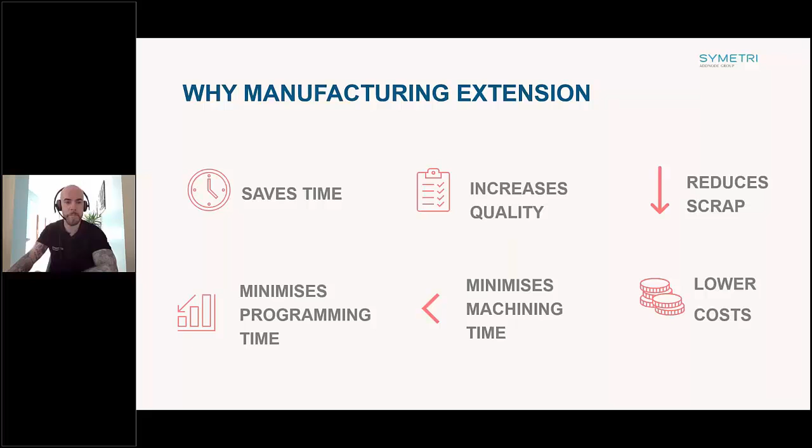So how is the manufacturing extension going to do all of these tasks, or how is it going to help us lower costs and minimize programming and machining times, etc.?

I'm only going to focus on my favorites. Bringing myself back to my machining days, these are the ones I think I'd be using in every single program. On a daily basis, all of these will be used, and they'll definitely decrease your programming time, decrease machining time, increase quality, etc.

I'm only going to skim through my top 5, which are also applicable to 3-axis users. To note, these are very simple to use, not one bit complicated. A lot of people see all these new strategies and think, geez, another area to learn, and get flustered, saying they don't have time. But these are absolutely simple strategies — you can do them in a matter of 5, 6, 7 clicks of the mouse, without putting in a huge amount of information. If you're already a Fusion user, you'll notice how user-friendly the software is, letting you create toolpaths very quickly and easily with the default settings Fusion has built in already.

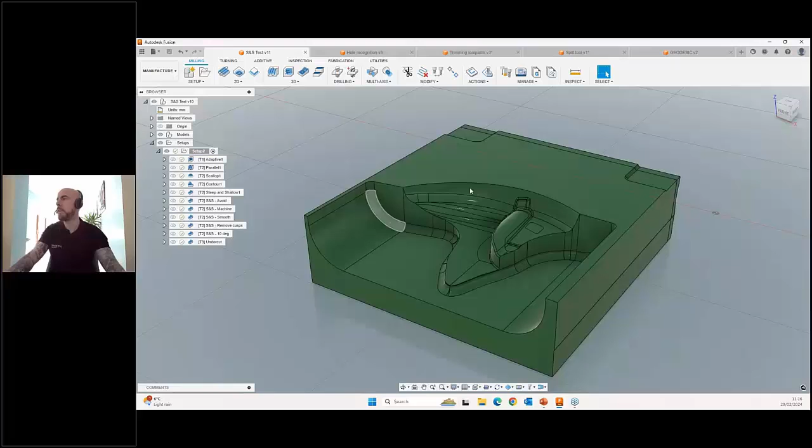So I have this part here on our screen. You can see this part would be fairly complicated to try to machine all of this. We'd have to come in and use multiple different types of strategies. As we can see, we have a huge amount of strategies that come with basic Fusion, so you'd end up spending a lot of time trying to get into all these tiny little areas, getting nice directions, nice flows to work all over.

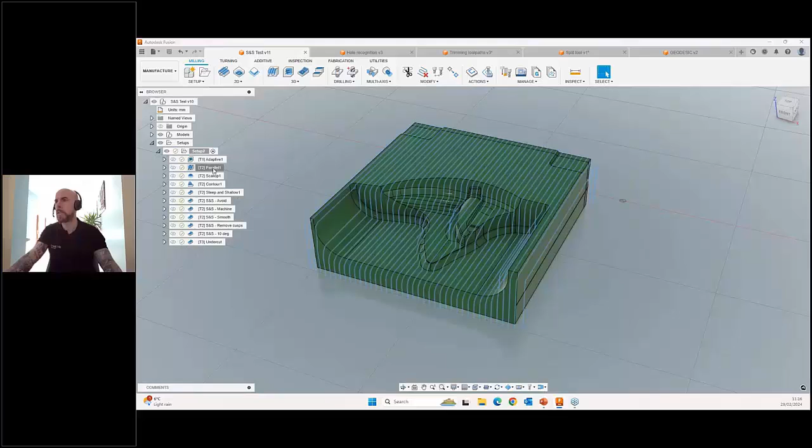One of the basic operations we have with Fusion that you can use without the extension is parallel. You can see parallel does a good job of flying over all of this, but it doesn't do a great job on the steeper areas. It doesn't have any direction either, so you could imagine the finish on this would be fairly crap.

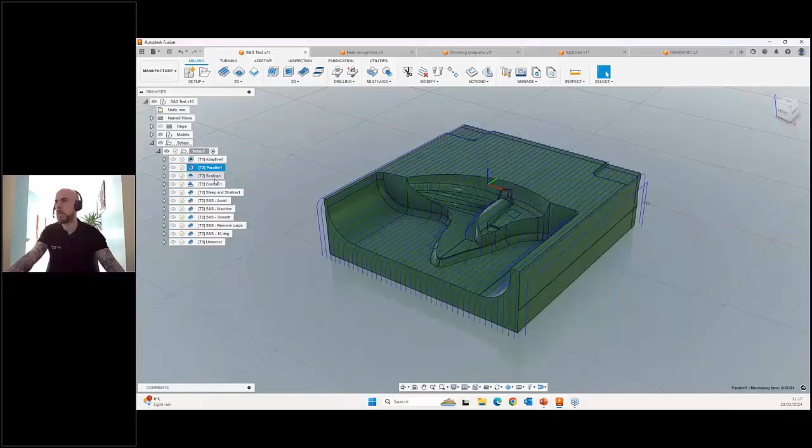We've also got the scallop. Again, scallop does a great job of it - it does a nice job on the steep and the shallow area. But again, you can see the toolpath, it's not going to look pretty when it's finished. It just doesn't go with the flow of the fillets, I suppose.

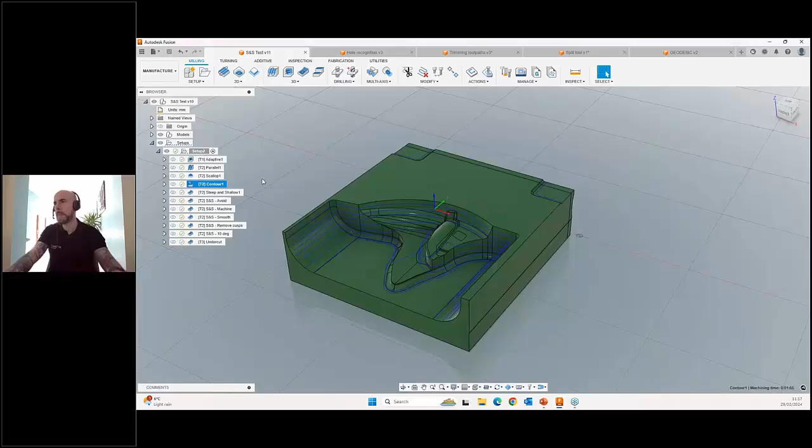And then we have contour. Again, contour does nice - it kind of follows the flow of the fillets, but then it doesn't do a great job anywhere else. So you would end up having to probably have a massive combination of these 3 strategies in order to get in here and do a really neat job of this little pocket area.

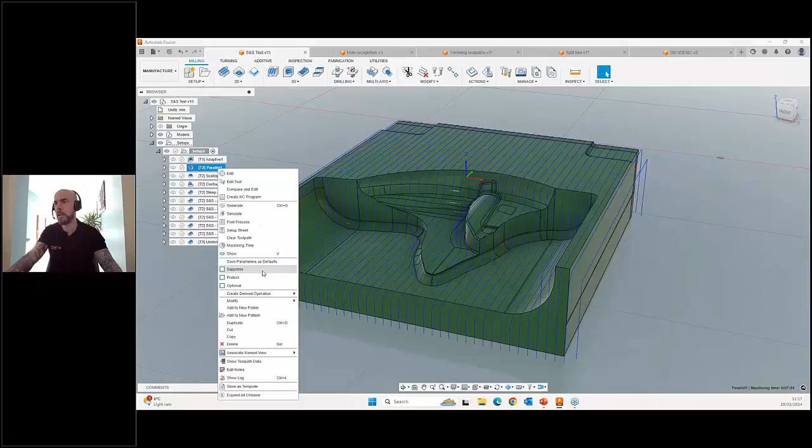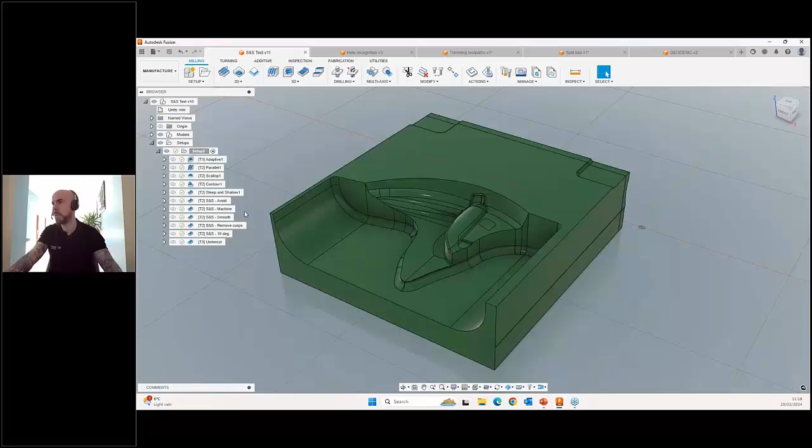While the steep and shallow, it does a really, really good job, and this was just a couple of clicks. I literally selected - I think I did a right click on the parallel and created a derived operation, did a steep and shallow, and all I did is decrease the step over, because I think the step over for all of these was maybe 1 mil or something. So I decreased it to 0.2. It mimicked the parallel and just applied the steep and shallow, but we can see that when the steep and shallow is shown up, it is flowing around with the fillets. It's actually doing a nice job on the flat surface and on the steeper areas as well.

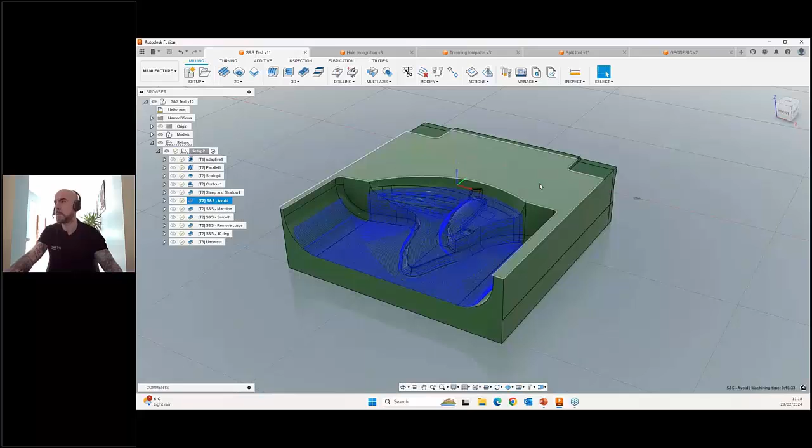Within that strategy as well, we can set it so that we select faces to avoid. We don't want to machine all of this because that would be a waste of time with the ball nose, so we can select what to avoid, or select what to machine. You can see we can just tell it to machine the corners here and the flat surface here, and it is kind of sharp with the corners. We can add smoothing, so you can see the difference between sharp corners and smoothing, and we can remove cusps as well - you can do all of this within the steep and shallow.

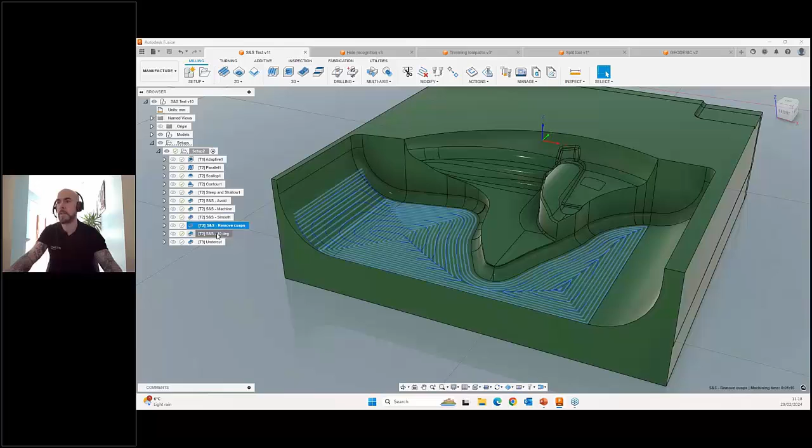So, as I said a while ago, if I go in and edit one of these, we can see the manipulation we can mess around with inside here, where we can tell it what slope from which areas we want to have a scallop and which we want to be parallel, etc. There's a huge amount of manipulation inside this strategy to be able to do this.

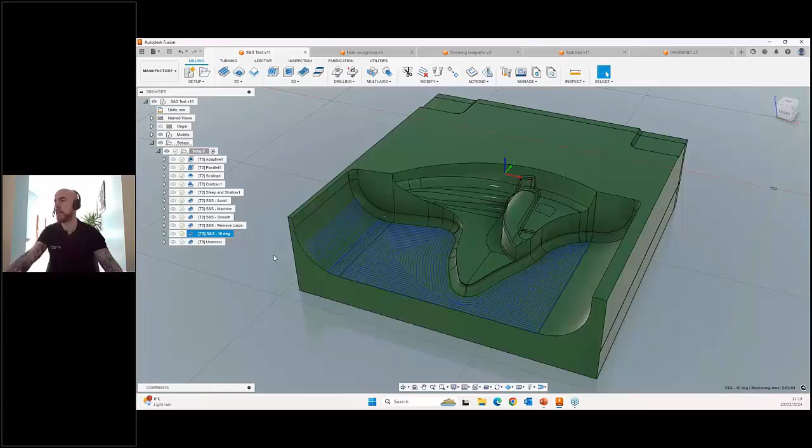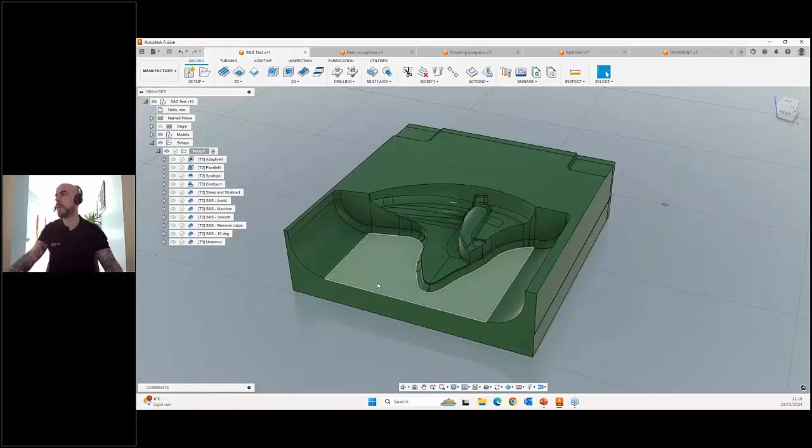But the main point I want to point out is you're cutting down your time basically in 3, probably way more than 3 actually, because the amount of time you'd spend tweaking these 3 strategies to do this, you'd probably save an hour or an hour and a half, if not 2 hours, because it would be very difficult to get in there and machine all of that.

It also allows us the ability to do undercuts. So you can see there's an undercut here. Again, if you have a 3-axis machine and you don't want to be spinning your part up for another operation, we can do the undercut here.

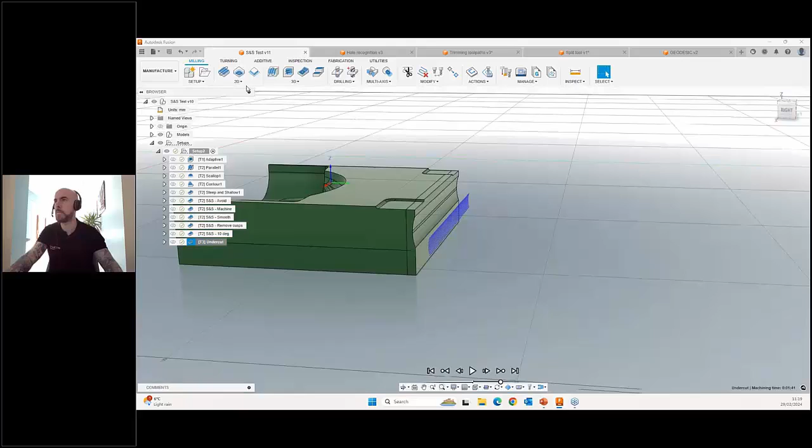So if I just run the simulation, I think I'm using a lollipop tool. You can run that undercut. So that is the undercut.

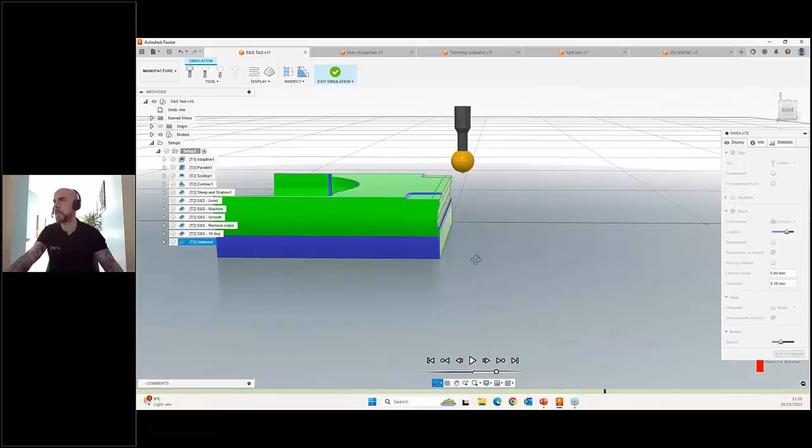So I like to just do little simulations from time to time. It's a bit dodgy when I'm doing it live because it can end up lagging a bit. So if you see it lagging, it's because I'm running this live. But yeah, I like to do the simulations, and I know my manager loves when I do a simulation also.

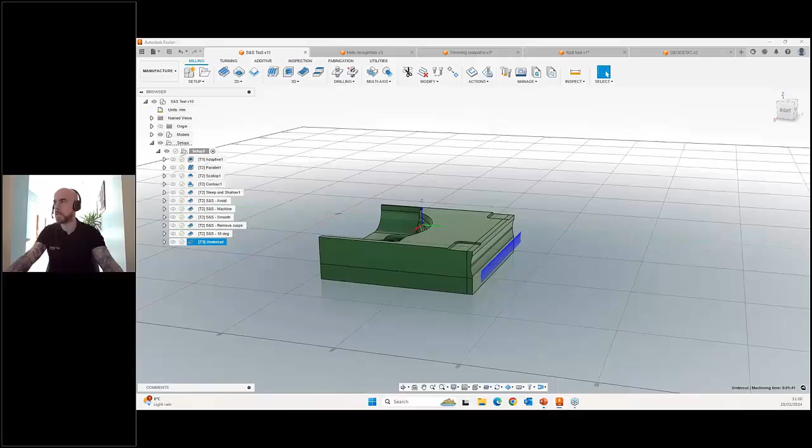So that's a little bit about the steep and shallow. I'm just going to jump back to my PowerPoint. So that's steep and shallow. Again, yeah, it's massive - that one strategy alone is worth getting the extension for.

And I've had customers who have said that also, that one strategy has been a huge time saver for them.

So the next one, the hole recognition, automates the process to create hole machining operations. The model is analyzed for cylinders, and those cylinders are assigned to an action. You can override the selection for different types of actions. The actions will be a combination of spot drilling, counterboring, boring, tapping, or reaming.

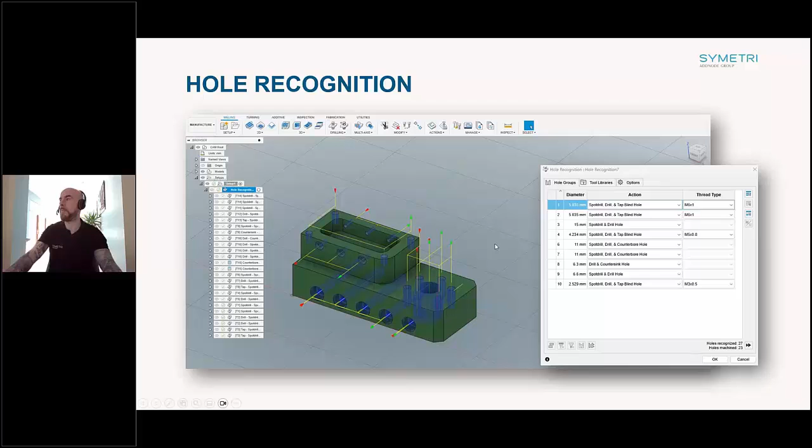So if we just get a little bit of a better look at this, you can see here that by me just selecting the hole recognition, I get this menu appear. And you can see straight away that it pulls out all of this. This is what I was saying a while ago - even if you just wanted to look at a part, you can actually see what type of holes are on this. So you can see it has all of these.

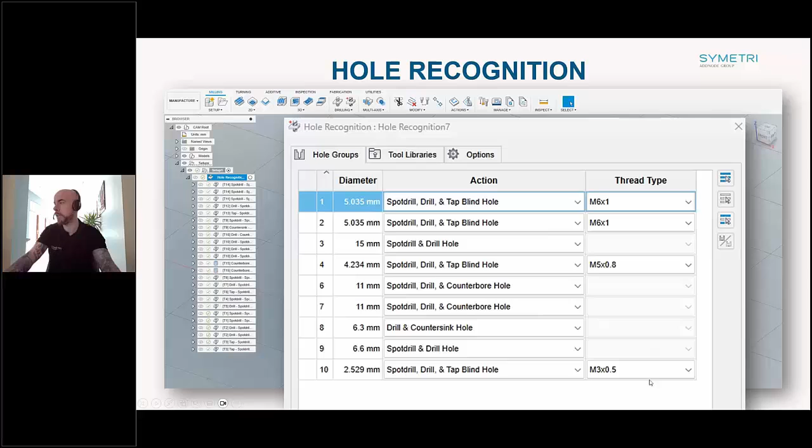Tooling already. So if I just hit OK on that, we'd end up producing all of this. And again, what's that, like 10 seconds work, as opposed to if I was to write all of these without the extension one by one - a couple of hours again, you'd be messing around here trying to do all of this.

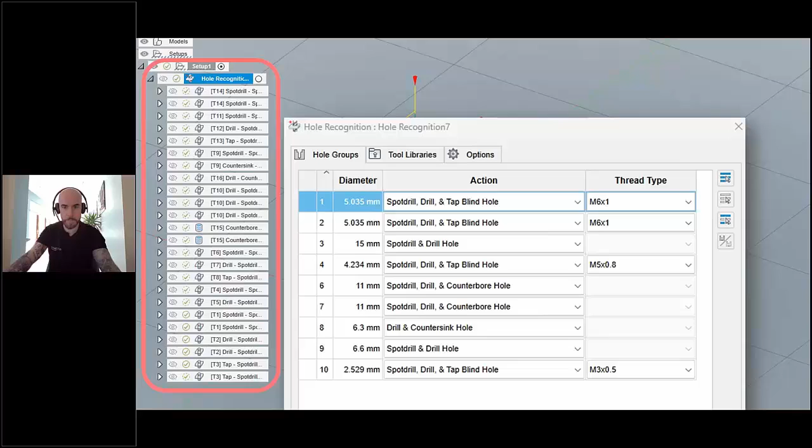What I'm going to do, because it's nice to just - again, some people don't believe me when I say this - so we have a part here, which is the one I had in the PowerPoint. Again, we're running this live. This isn't a video written, so I may make a mistake or I may lag.

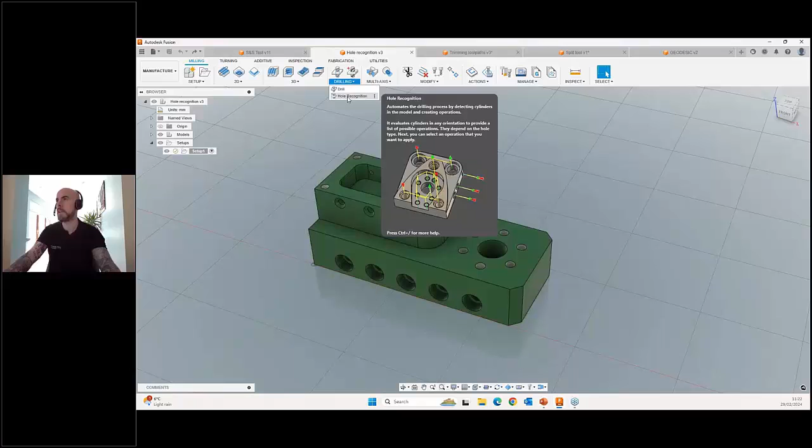So we have a setup done here already. I'm just going to click on the hole recognition. My dialog box appears. You can see it's telling me which holes are which.

And if I want it, I can go into my options and select multi-axis machining, and I go back, and now it's even giving me all the other ones. And if I just press OK, there we are - everything is done.

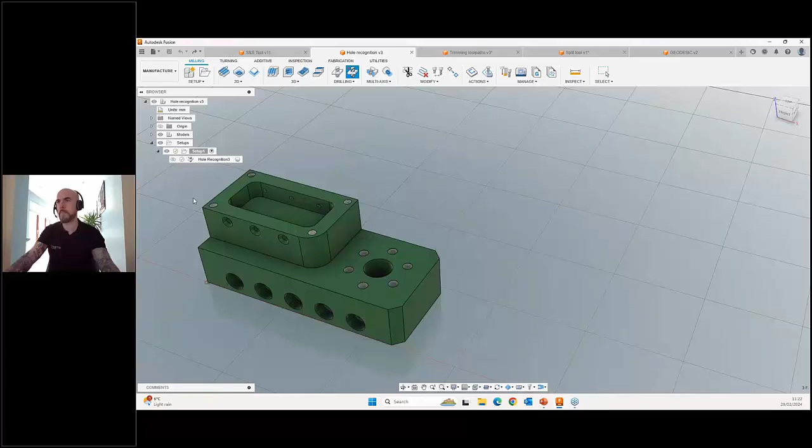So again, that was - it's a huge time saver. Again, it's a no-brainer to have that tool as part of your package. So again, going to jump into the next one. So that's the hole recognition.

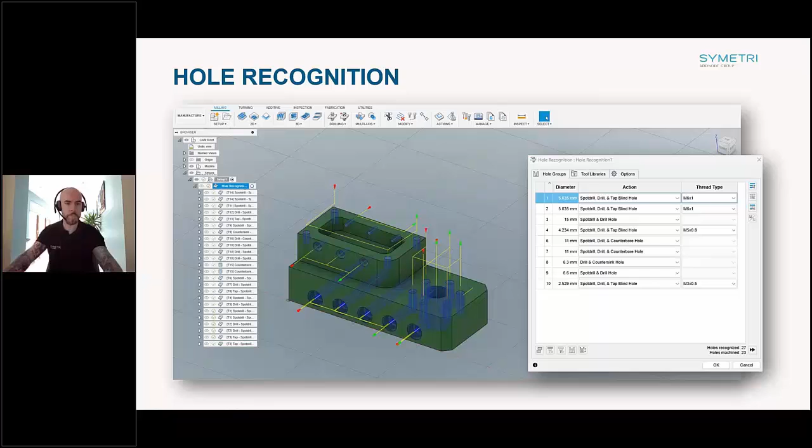So the deburring strategy - nobody likes deburring parts. Deburring parts by hand can be very inconsistent, especially when you're using needle files and deburring tools, etc. Again, going back to my years ago when I used to be machining, that's what we used to always do - loads of needle files, loads of little deburring tools, and we'd have 10 parts and they'd all look different. Improving the quality and reducing time spent deburring is always a win-win situation.

It looks more professional when the customer receives his batch quantity and they're all identical. The deburring strategy is a finishing operation used to deburr external corners that are sharp around it. The deburring improves the look of the part and its fit. It also reduces safety hazards when handling the part because sharp edges get deburred.

My missus would vouch for that. I used to come home with plasters all over my hands from tiny little nicks.

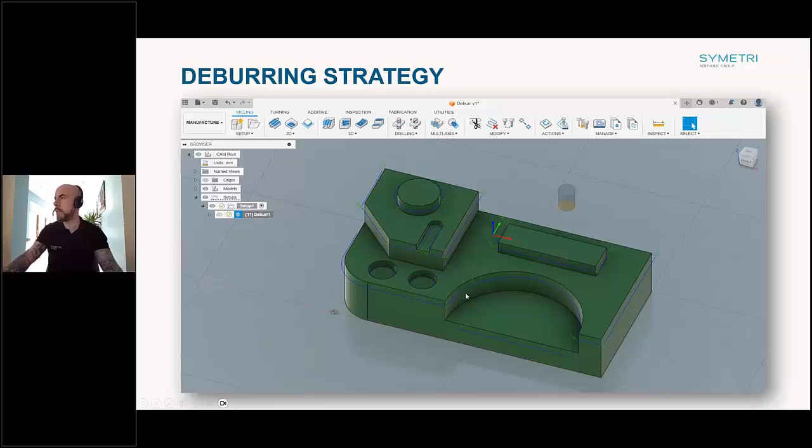So if we just have a wee look at this, what I'm showing is it looks for edges. It takes into account the size of your tool and the shaft, and it allows clearance, so you don't have to worry about the tools crashing into walls or areas of the part, leaving bad finishes or burrs. So we have a shaft clearance of 1 mil here, which is quite big, and you can see the 1 mil clearance. If it was me, I'd be pumping that down to probably 0.2 to get right in there and as close as possible to that.

You can also adjust the width, so you're using different parts of the chamfering tool as well, so you could actually chamfer all of this in, or get the whole lot of it if you messed around with those settings.

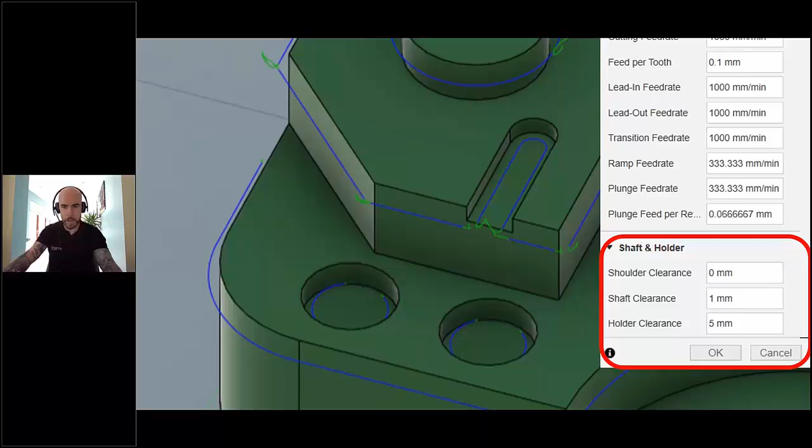Okay, so coming back out, you can apply this for 3-axis, 4-axis, or 5-axis machine. If you were running this on a 5-axis machine, it'll pick up all the parts. Not too sure if I have a demo for that one, let me have a look. No, I don't, sorry, I didn't do a demo on that one because it's very basic to do.

It's just clicking on the button, very much like the hole recognition. It'll pick up every single edge, and you can deselect ones you don't want to touch, and reselect ones you do want to touch. Actually, you won't, because it picks up every single edge, so you can deselect the ones you don't want to touch.

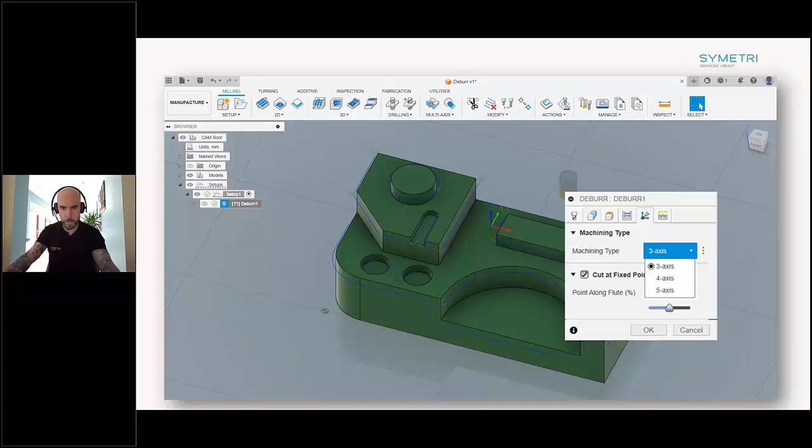So, trimming and splitting tool parts. My data set here is not very pretty looking, it's just a cheese block basically on the bed, and I want to just skim the top of it. If I was to do that, obviously I need clamps to hold it onto the table.

So this function is hugely important and so handy, as I didn't have to be messing around with sketches and the design environment, using them as boundaries to avoid loads of unnecessary work. The toolpath allows me to get rid of areas where the cutter may be cutting air at times, but it also allows me to not touch areas that I need to keep the tools away from.

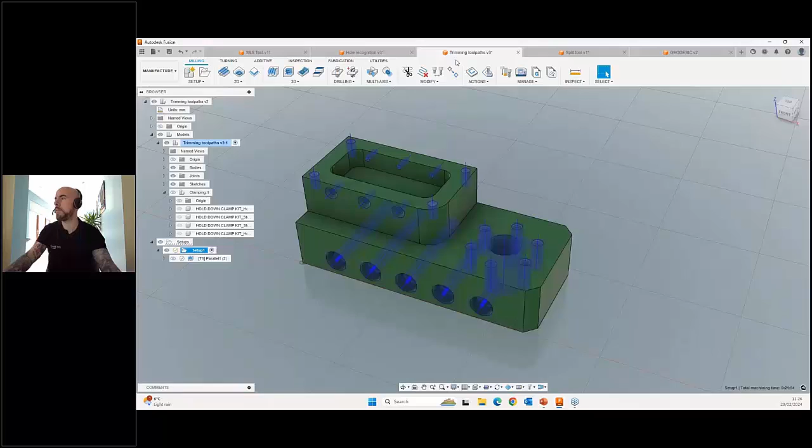So let's jump in here and have a look at this. There we have our toolpath, this is just a very simple parallel. If I was to add my clamps onto this on the table, now I'm going to end up smashing my cutters here. So to do this very, very easily, I can just spin this up like this, and...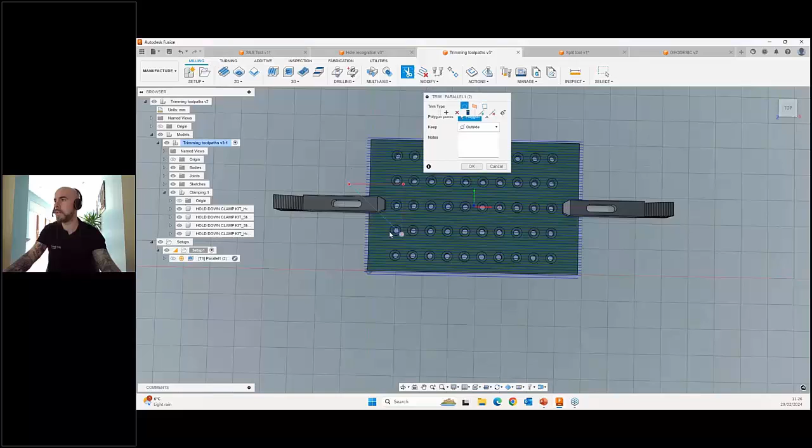I'm oversizing this, and I'm going to OK that, and I'm going to do the same over here. Again, not very nice the way I've done that, but you can see what I've done there. I've removed the tool paths from those two areas in order for me not to hit those clamps.

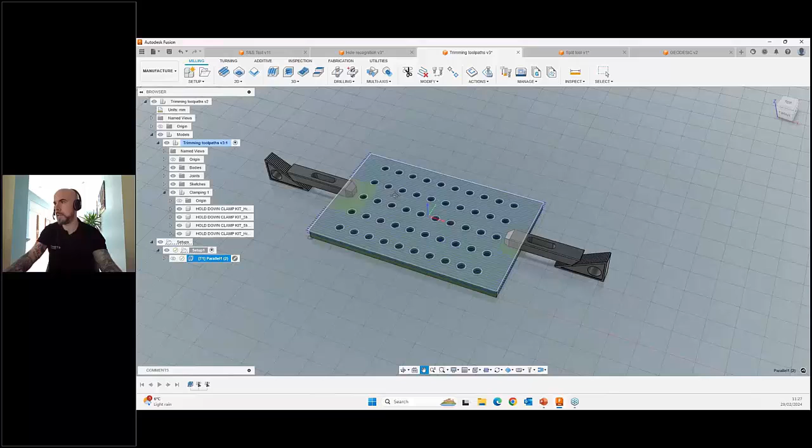I can even go a step further, because I'm going to have to come back and machine these. So when I have this done, I'll probably end up moving the clamp over to here and this clamp over to here, and I need to finish off this area.

So what I should have done is, if I go back in and edit, you can see it creates this in the design history. I want to go and say both and press OK. And I want to do the same over here, I'm going to say both. There we go, so now I actually have that also, and I've got that as well.

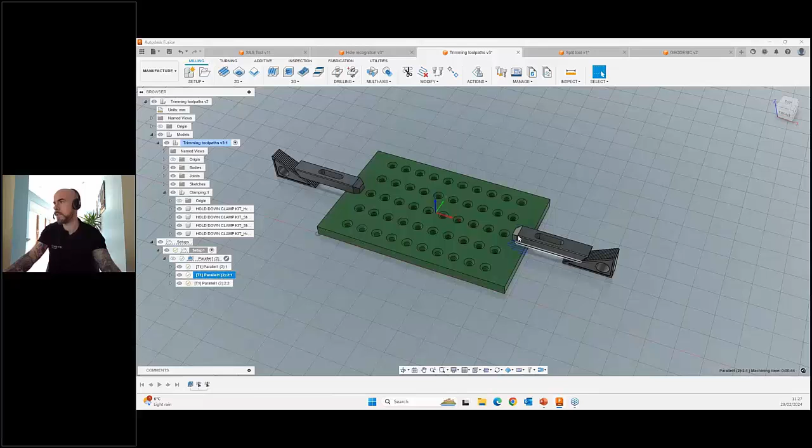So now you can see I can go back in and finish these, and I have my different toolpaths available. I have 3 different toolpaths, 3 different tools, or 3 of the same tool, whatever you want to do. But again, massive time saver to be able to do that, and you can cut whatever you want.

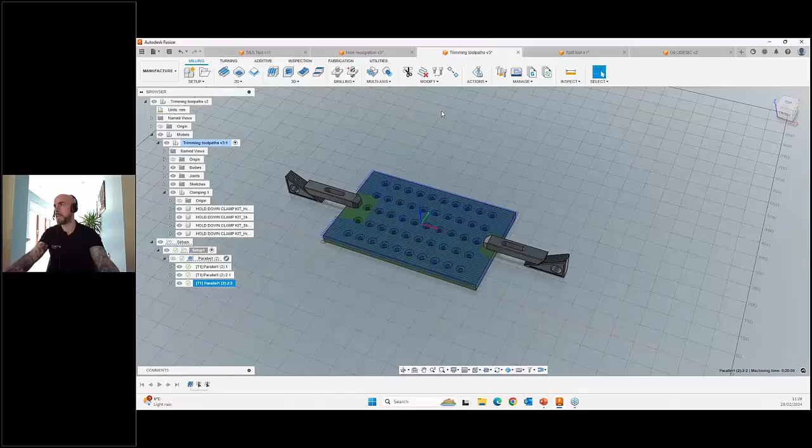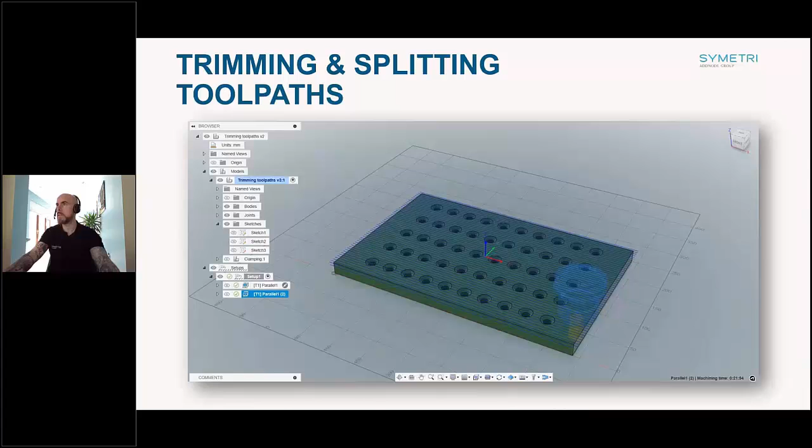You can cut different shapes, you can use the boundary, sketches, surfaces or planes to do your trimming and cutting as well. So if I just jump over here, the next one that I want to look at... what did I do there? I think I clicked something too much, sorry, I have to go back.

So again, another nice thing of splitting the tool is, if I have a part like this, we can see it's going to machine all of this. I'm actually using the steep and shallow again, and you can see steep and shallow is pretty impressive.

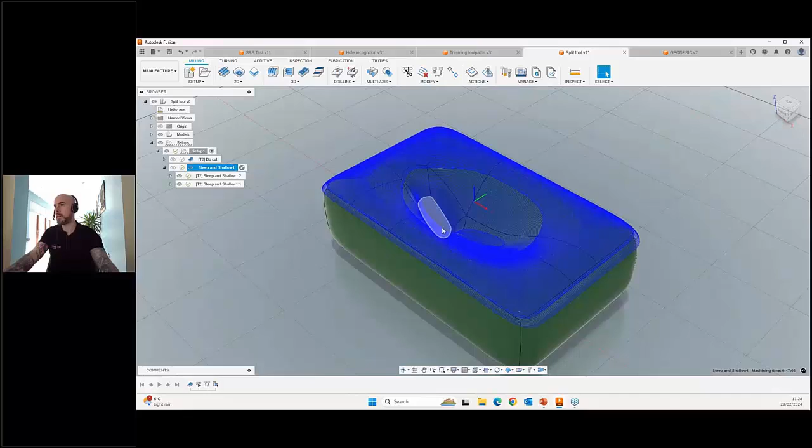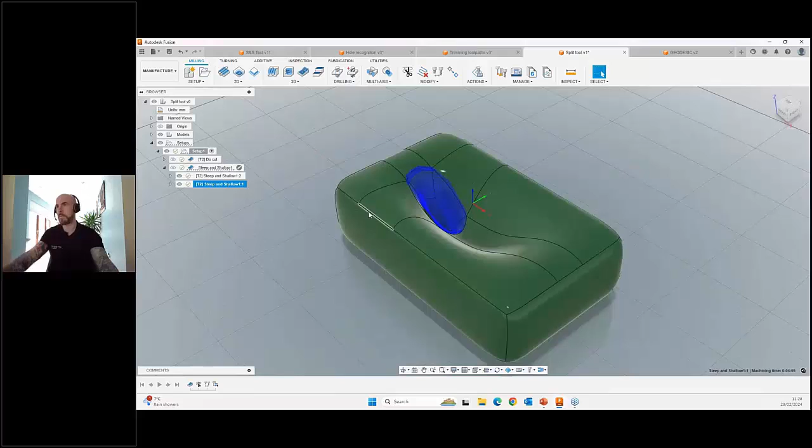But my tool may not reach down in here, so I don't want to have my cutter sticking out too far. So I split the tool in two. I cut this piece out and left that be, and then I'm going to swap tools and go in with a longer length tool in order to be able to reach inside there.

Or I can change the tool completely and go to a smaller size, like a 6mm instead of an 8mm. But you can see over here now I've got two different tool paths, both the steep and shallow, but it's taken both into account. Again, huge amount of manipulation, stepover, etc. And do all of that within that.

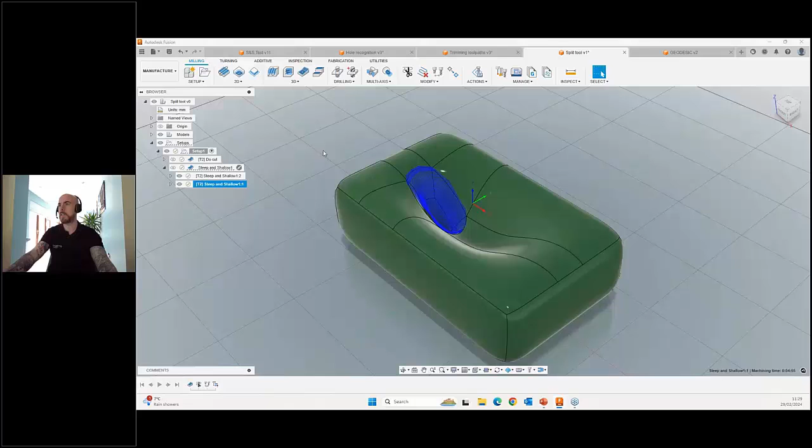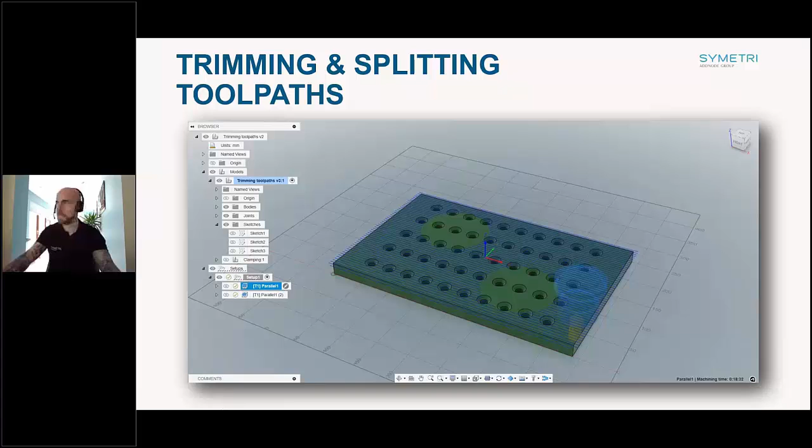So okay, back to PowerPoint, and the last one we're going to look at here is the Geodesk, or geodesic strategy. Apologies. So this is a new feature in Fusion, as I mentioned earlier.

The strategy performs a finishing operation to machine free-form surfaces and difficult undercuts. This toolpath consists of multiple passes arranged in patterns using different types of offsets. Using this strategy, you can achieve smoother toolpaths with a higher quality of surface.

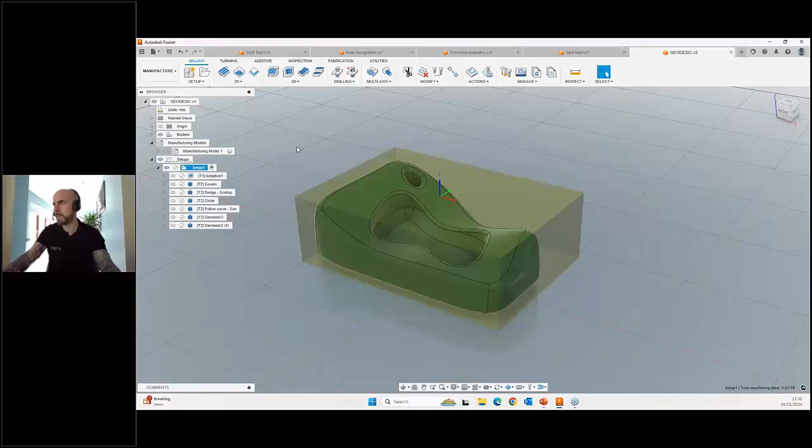So I'm going to jump in here and we're going to give this guy a go as well. So you can see here's a completely bizarre looking part with loads of different curves and surfaces on this. So this is actually a free form part which consists of multiple surfaces.

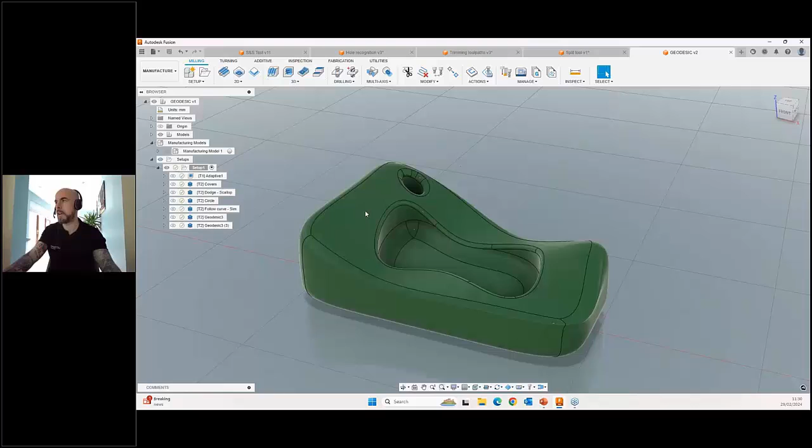So it's something that Fusion wasn't able to do at one point. When you were trying to do surfaces, you had to use a different strategy, which would have probably been a blend. Or there's another one, I can't think of it right now. The blend was a good one for surfacing, but it was very left, right, or in, out type of a movement.

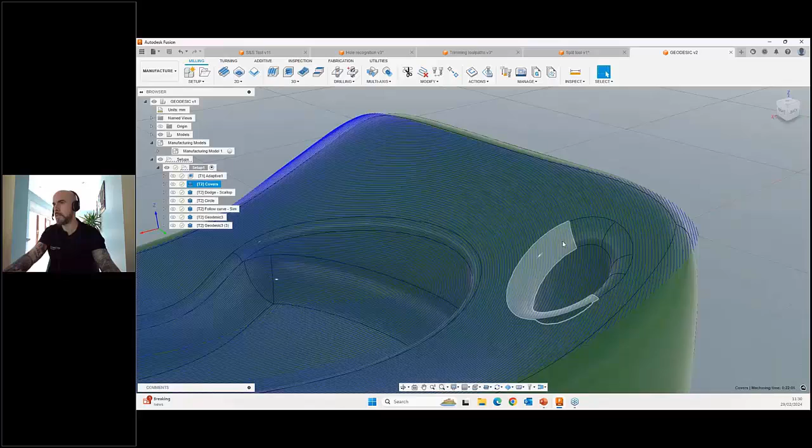Where the geodesic, we can cover the whole part, and we can see here that it's actually running over the hole. It's not actually going into the hole. So the toolpath is going straight over the hole, and we can do this as well if we think we're going to be cutting a lot of air around here. We don't want to be doing that. We can actually dodge the holes as well, and it takes that into account.

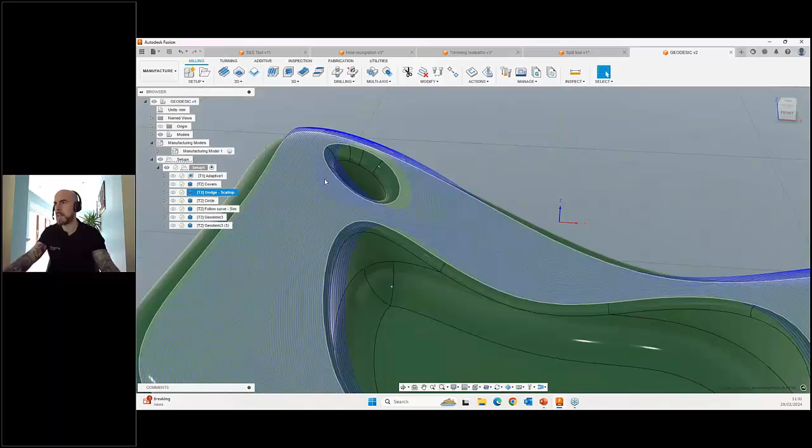So you can see the way the strategy is cutting here. It looks similar enough to a scallop, but it's on an actual curved surface. But you can see your finishes might be a little bit inconsistent, I suppose. So you can actually go into the geodesic and change what type of finishes.

So we can do a circular motion. You can see here, a little bit prettier, but up here we can see it has a different type, it's moving a different angle. We can actually follow the curve.

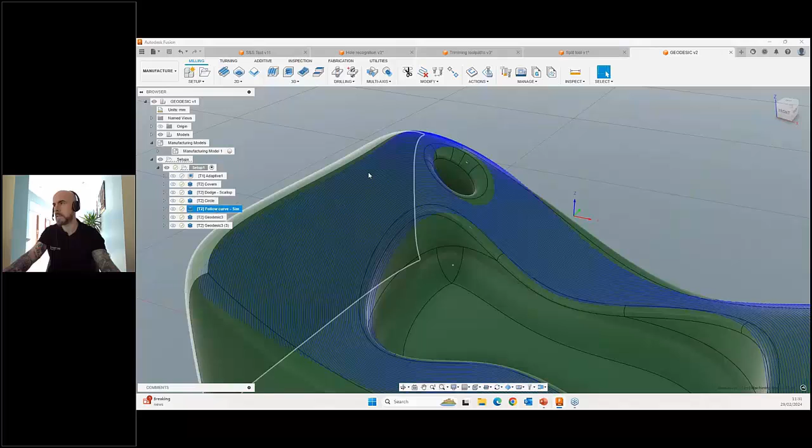So what I've done for the next one is I've followed this curve, and it's taken that into account. So now it's actually doing a lovely flow right around this part. And you can imagine the finish on this guy would be

nice looking. And then again, we can go into the pockets. We can select different surfaces, different fillets to go in there and machine out. And again, changing the way that we machine it.

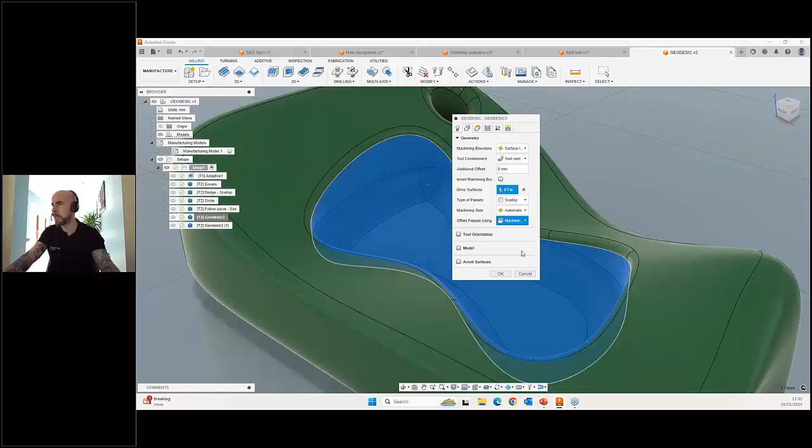I think if I go in, I hate going into editing things on a live webinar because it sometimes won't allow me. So if I go curve with selection and I want to go with this, press OK. Hopefully this won't take too long to update.

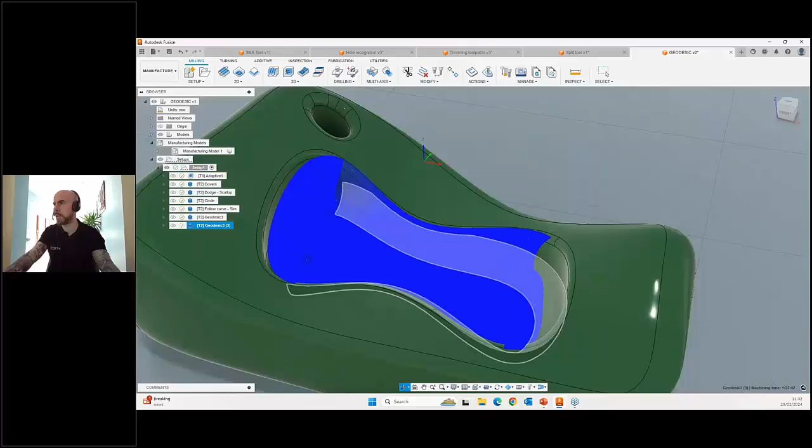And we can see now it's actually flowing with the curve on this. And then the last one then was, I can't remember what I was doing there. I think I was still messing around with trialing on this guy here. So that is a little bit about the geodesic toolpath.

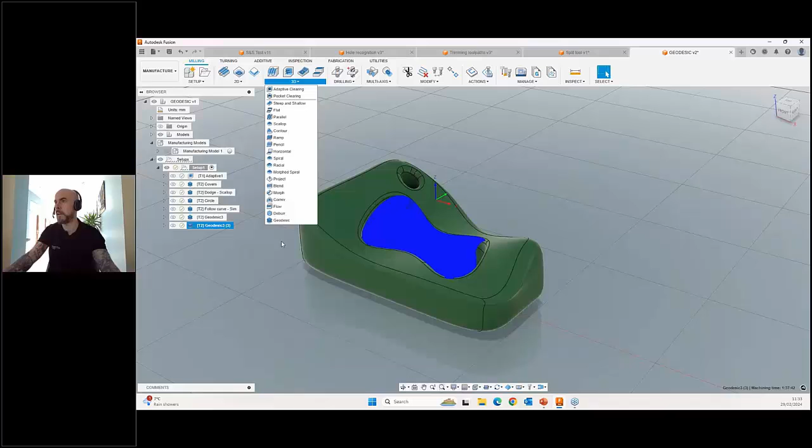So again, that is after being added into Fusion, into the extension, only in the last month. But it's definitely, I was actually presented last year from a customer. They gave us a part, and I couldn't actually get it machined because it had 4 surfaces, and they kept doing one surface and then jumping up and then going into the second surface. This geodesic would have solved that issue. So I must go back and reach out to that guy again.